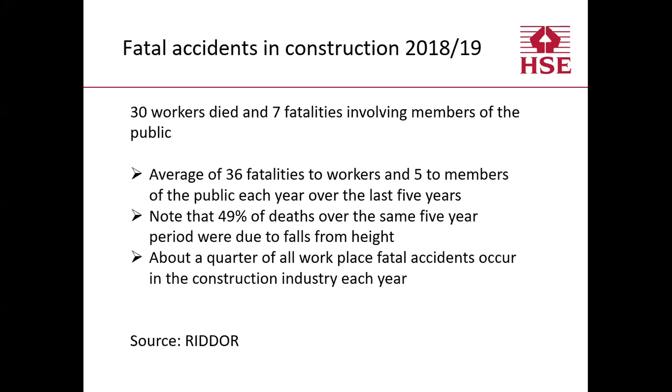But I think what's particularly of a concern is the fact that if you look at all workplace fatal accidents that occur across British industry, then about a quarter of those occur in the construction sector each year. Although the health and safety performance in the sector has improved significantly over the past decade, and we've seen a fairly general long-term downward trend in the number and rate of fatal injuries, the sector remains one of the most hazardous, accounting for, as I say, about a quarter of all fatal injuries to workers. It's truly shocking if you look into the detail.

For example, the 5-year period from April 2012 to March 2017, almost 200 construction workers were killed in workplace accidents. And looking at the average of the last 3 years, each year, about 64,000 workers in the industry receive an injury at work, and about 80,000 suffer from work-related ill health. The majority of fatal accidents, sadly, involve small businesses, SMEs, and nearly half of all reported injuries occur in refurbishment activities. Risks on larger projects can, of course, be substantial, but generally speaking, the larger projects are better at controlling risks than most small projects.

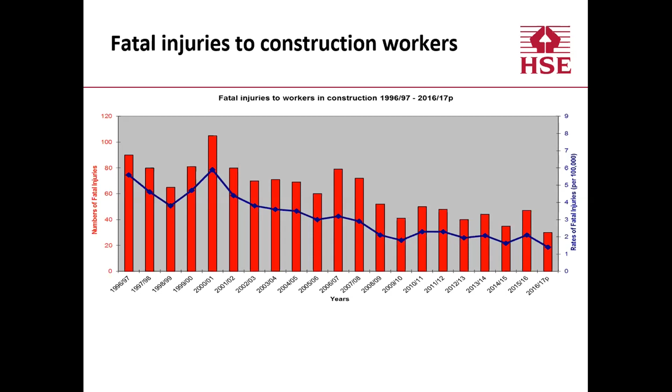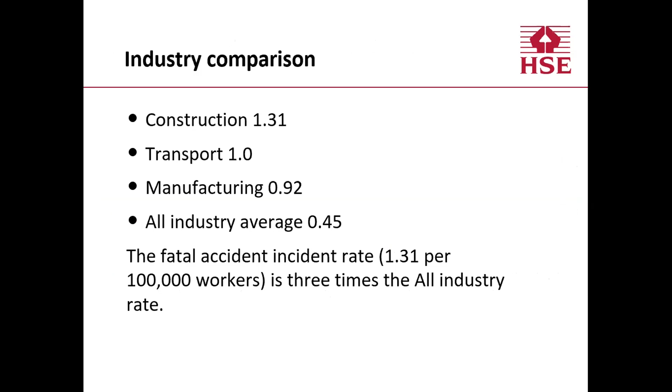So how does it compare with other sectors? Well, this slide just gives you an indication of health and safety performance by means of looking at the fatal accident incident rate. That's the number of fatalities per 100,000 workers in the industry. Probably no great surprise to you to see here that the fatal accident incident rate for construction is 3 times the all industry rate. And in fact, construction is second only to agriculture in terms of being the poorest performer.

So of course, we do want to see a continuation of the downward trend in fatal accidents, work-related ill health and injury. And so it goes without saying construction will continue to be a priority sector for HSE.

In terms of enforcement, then, I've put this slide in because I think it's important that we recognise that there's a lot of enforcement still being undertaken by our inspectors in our operational teams. And in fact, for 2018-2019, just under 3,000 enforcement notices were served by inspectors during the course of their interventions. Approximately 1,300 were improvement notices and 1,600 were prohibition notices.

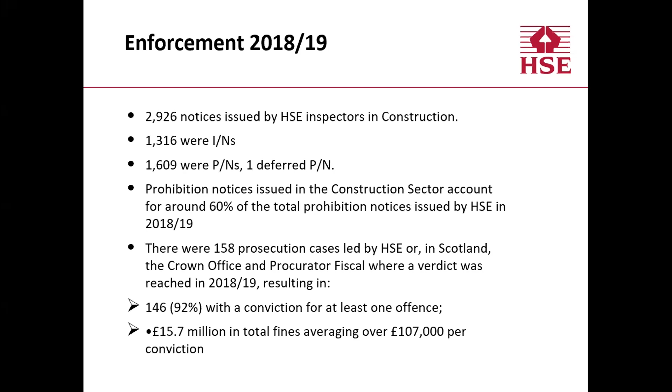And in fact, on the prohibition notice side, that actually accounts for around 60% of all prohibition notices issued by HSE. So it's certainly an enforcement-rich environment. During that particular year, there were 158 prosecution cases with a 92% successful conviction rate. And as you can see from that slide, the average fine was in fact in excess of 100,000 per conviction.

So where does that lead us to? What do we conclude from that? Well, clearly construction will continue to be a priority for HSE. And hopefully most of you will have seen the sector plan for health and safety in construction, which is published on the HSE website. I haven't got time today to go through everything that it covers, but I just wanted really to pick out 3 key areas.

As I said just a few minutes ago, we have a really big problem with the death and injuries on the smaller sites and the SMEs. So we want to continue supporting small businesses to achieve improved risk management and control. And also, the focus has to be on ill health. We can't just ignore health. We need to see a reduction in ill health, and particularly a focus on occupational lung disease and MSDs.

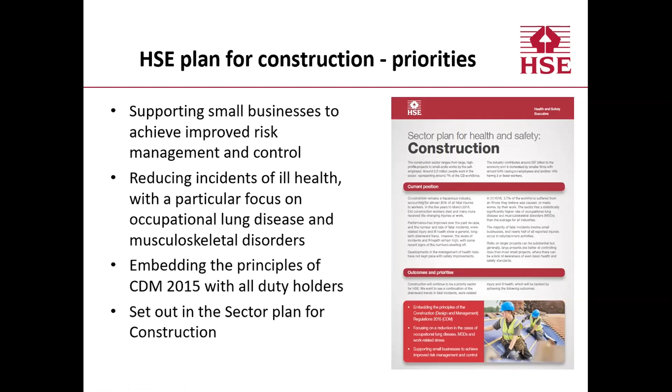And key to achieving the outcomes that we want at site level, we must ensure that we embed the principles of CDM 2015 with all duty holders. So it's not just the people at the sharp end, it's all the duty holders. We need to take a holistic view and make sure that all duty holders are fulfilling their roles adequately. And all of this, as I say, is set out in the sector plan for construction.

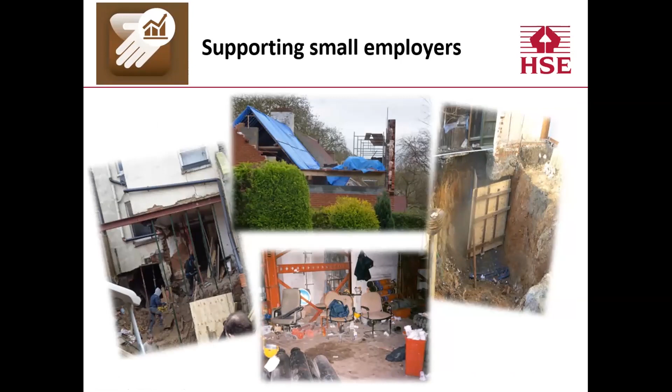By supporting small employers, yes, of course, we're going to continue to refine and update and improve our guidance. But small employers and small sites, they remain a challenge for us because we do find very poor standards very often when we visit them. And it comes as no surprise, I guess, that they're responsible for around 3/4 of all the fatalities that we have. And 1/3 of those are to self-employed individuals.

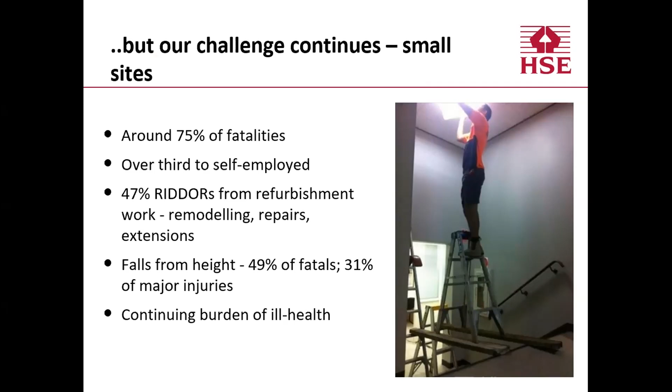Almost half of the RIDDORs we get are from refurbishment work, which is the kind of work that you typically find SMEs engaged in. And as I mentioned earlier, falls from height account for about half of all those fatalities and 1/3 of all major injuries. And sadly, there's also the continuing burden of ill health.

So the challenge that we face in the industry, I think, is this. We need to treat health like we treat safety. We need to ensure that we have in place adequate measures to manage health risks, because ultimately that should be no different to managing safety risks.

And it is possible and it is practical to carry out work without causing ill health. And crucially, everyone has a role to play. It's not just about the person at the sharp end on the tools. Everybody must take ownership of their part of the process.

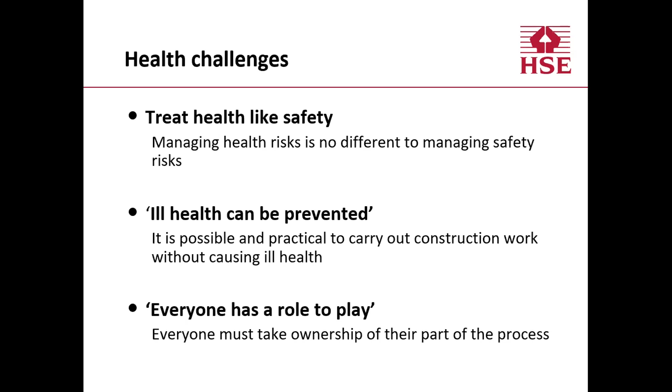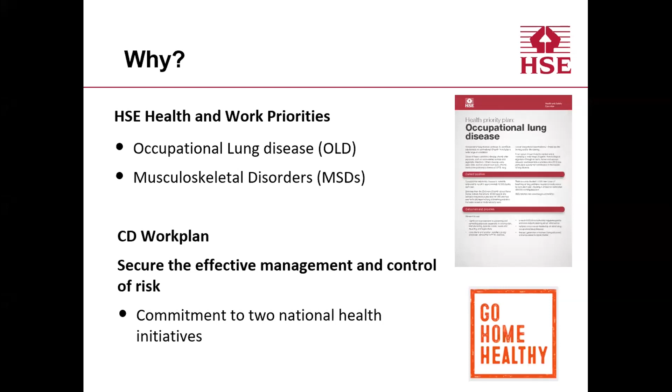So what can HSE do? Well, HSE decided last year that it would run a health inspection initiative. And this would be run in essentially 2 campaigns, which I'll come on to in a moment. The reasons for this, well, it's within the overall HSE priority plan, particularly in terms of tackling occupational lung disease and MSDs, and it was also within the construction sector work plan, as I mentioned a few moments ago, in terms of securing the effective management and control of risk. So on that basis, we committed to run 2 national initiatives.

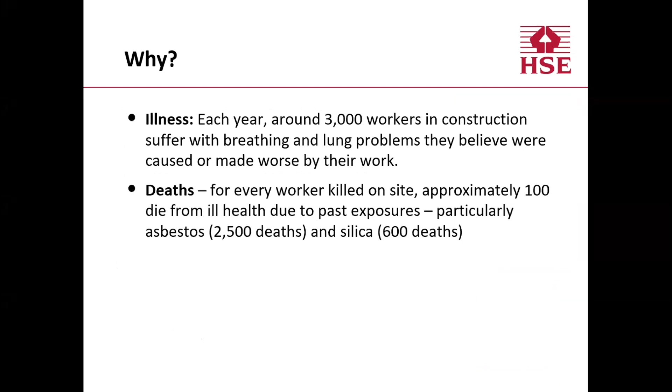We know each year around 3,000 workers in construction suffer with respiratory problems. And we also believe that for every worker killed on site, approximately 100 die from ill health due to past exposures, particularly in relation to asbestos and silica.

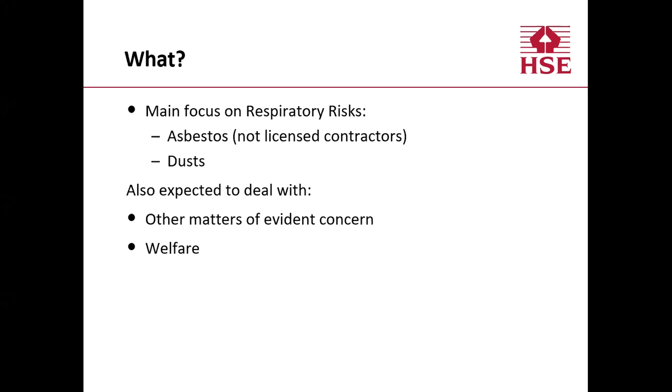So we decided in this campaign we'd focus very much on respiratory risks and their control. We'd be looking at asbestos, and we'd also be looking at a variety of dusts. Our inspectors in the field were also instructed that they were to deal with any other matters of evident concern, and also to focus on ensuring that welfare was adequate.

As I say, this was to be a national inspection campaign targeting a whole range of sites where at least one significant respiratory risk was anticipated. And crucially, we decided that we wanted to get a broad range of data from our visits. So no sites were to be excluded. We were not just focusing on small refurbishments or domestics.

We were looking at a cross-section of sites right across the board, using local knowledge, using our F10 notification database in order to maximize our operational efficiency and impact. The campaign was run in 2 phases, one in the summer, one in the autumn, and we gathered the data from that, which we then were able to analyze. We carried out almost 1,700 inspections in that time.

And looking at the data afterwards, we found that overall the material breach rate was 53%. An inspection was considered to have found a material breach if the visit resulted in the issue of a PN, an IN, or a notice of contravention. As you can see, the breach rate generally decreased as both duty holder and site size increased. And probably no surprises, domestic refurbishment had the highest material breach rate at 65%, and new build commercial the lowest, but still an interesting 46%.

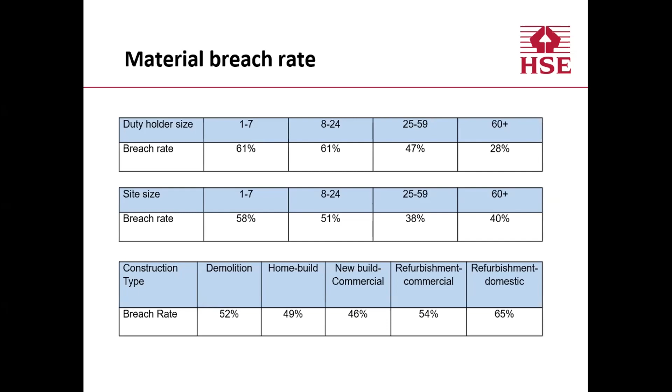In terms of compliance ratings, I've put this slide in because I think it's quite useful in terms of giving you a broad indication of the level of compliance on a whole range of topics. So if you look at the column with the number 1 at the top, a number 1 compliance rating is given for sustained compliance. So for example, with work at height, where that topic was encountered on site, 31% of the working at height received a 1 rating, indicating sustained compliance. Everything to the right of that, ratings 2, 3, and 4, are varying levels of non-compliance, with 4 being the worst rating.

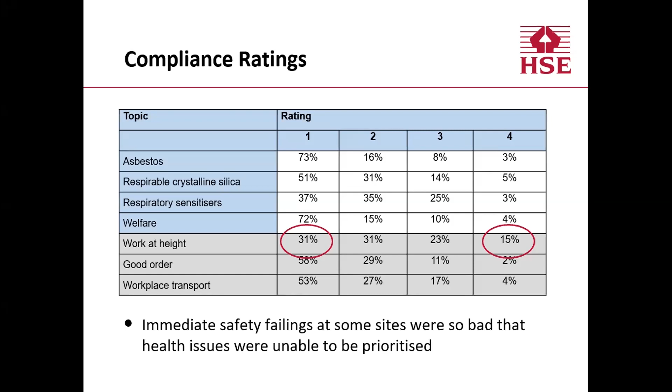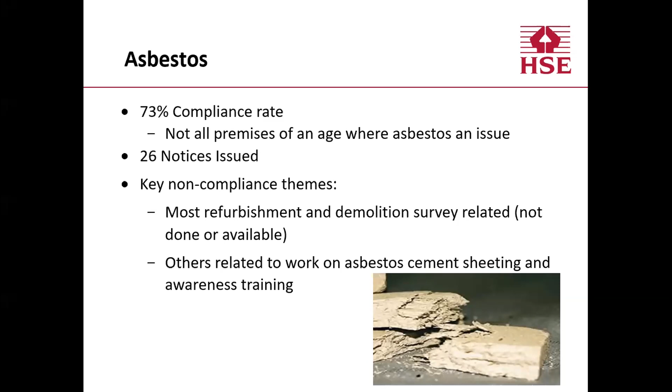Looking at some of the issues that inspectors found on site, with asbestos, we had a 73% compliance rate, but nevertheless, we still had 26 notices served. And as you can see on this slide, the key non-compliance is related to surveys, either missing or inadequate. Others were relating to work on asbestos cement sheeting and the lack of awareness training.

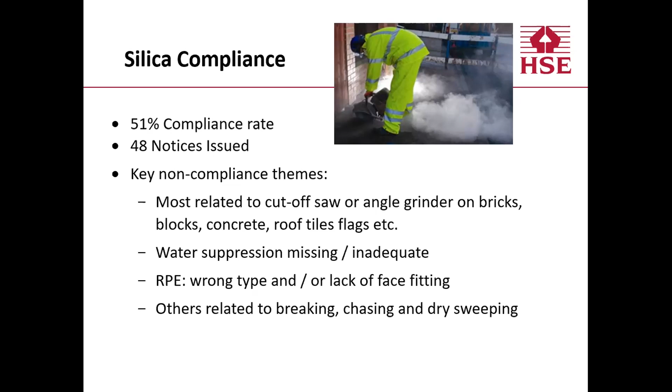Silica, only a 51% compliance rate, 48 notices, and key non-compliance themes. I guess no surprises. You can see in that photograph a fairly typical example of using an angle grinder or cut-off saw without any dust suppression, wrong RPE or lack of face fit testing, dry sweeping, a whole range of issues.

And similarly with respiratory sensitizers, where we only had a 37% compliance rate. This is mainly in relation to woodworking, carpentry, 17 notices and key non-compliances, again relating to cutting activities with power tools, lack of extraction, wrong type of RPE, or RPE missing altogether, lack of face fit testing, and dry brushing and sweeping. So I guess probably no surprises, but nonetheless, extremely disappointing to see the failure to provide so many basic precautionary measures.

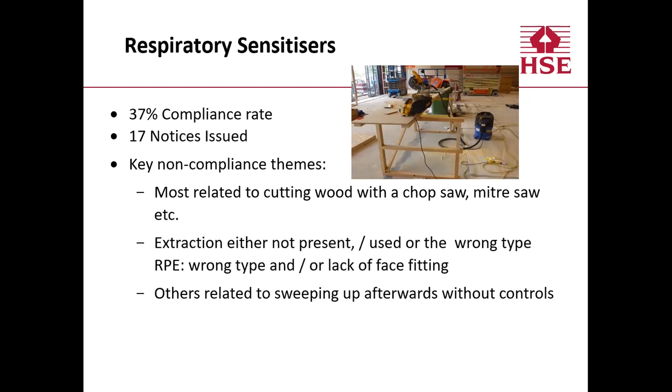Welfare, 72% compliance rate, but nevertheless 49 notices issued. I just cannot believe that we can't get adequate toilet and washing facilities in this day and age. Unbelievable, some sites still without any facilities at all, or some sites where the facilities that were provided were wholly inadequate or inadequately maintained, sometimes no flushing toilet, lack of running water, all sorts of potentially straightforward issues that hadn't been resolved, resulting in enforcement action.

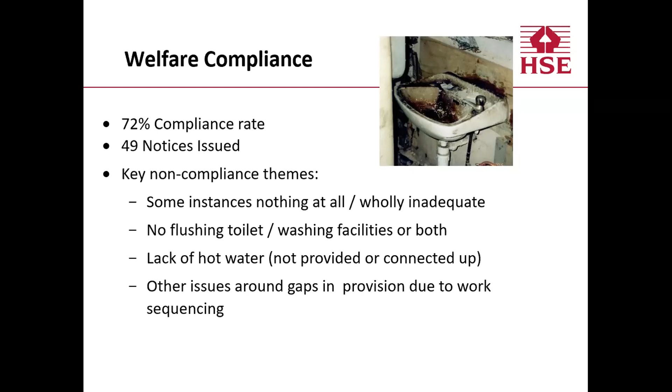So then, just to kind of summarize, what does this tell us? Well, it's given us a snapshot of the industry, and the chances are that if we went out and carried out the same intervention again, we'd get the same results or very similar results. The risk profile of the industry hasn't really changed that much. I was inspecting construction 20 years ago, same problems 20 years ago, same problems today.

Work at height, in particular in the small refurbishment jobs, it's a classic enforcement scenario. Lots of enforcement action required to address fairly basic failures to manage work at height correctly. The frustration is that the industry knows what's wrong and has known what's wrong for a long time now, but it needs to take more fundamental action, do something positive about it.

And we do believe that improving things goes beyond simply regulation and guidance on what to do. HSE has produced tons of guidance over the years, and other duty holders have done the same. But we need to go beyond that. We need to take the next step, because it's really about changing hearts and minds, behaviours and relationships, if we really want to make a difference to those awful statistics that we saw near the beginning.

So again, turning to our priorities, yes, we're going to continue supporting small businesses so they know how to achieve improved risk management and control at site level. And we must work harder to reduce incidents of ill health, with a particular focus on those occupational lung diseases and MSDs. And it's important that we do continue to embed the principles of CDM 2015 with all of the duty holders.

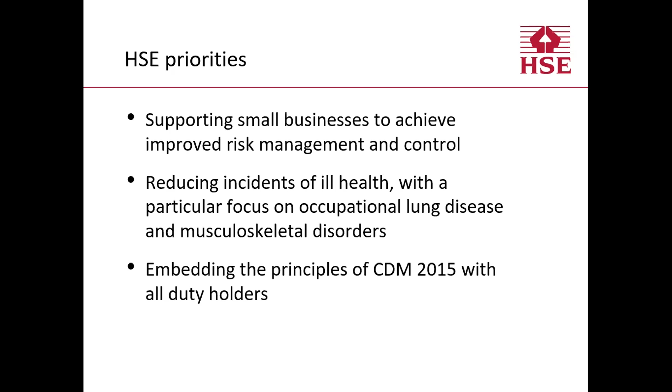When I talk about embedding CDM, I think it's important that we look beyond simply the contractors working on site. We have three key priorities within CDM. This is really adding clarity to our priorities. The inclusion of the client, of course, is vital, but we need to find new ways of persuading and engaging with disengaged clients. We need to persuade clients and their advisors that investment in planning the pre-construction phase will pay off.

And in design and planning, we need to share our learning through our own experience of engaging with duty holders and what we believe is emerging as best practice in complying with CDM. And as digital technology moves forward, we're beginning to find that these could potentially be a huge benefit for designers and principal designers in carrying out their planning, management, and coordination roles. And we hope that as we go forward, we'll be able to share with the industry how these can contribute and inspire designers and principal designers to use and develop these tools.

So how are we going to do that? Some of these objectives are things that HSE can try and do alone, but most of them are going to involve some engagement with the industry. How will we achieve what we want to achieve? Well, HSE has a long and well-established history of working with the construction sector stakeholders, and one of the best ways that we do that is working through our industry advisory committee, CONIAC.

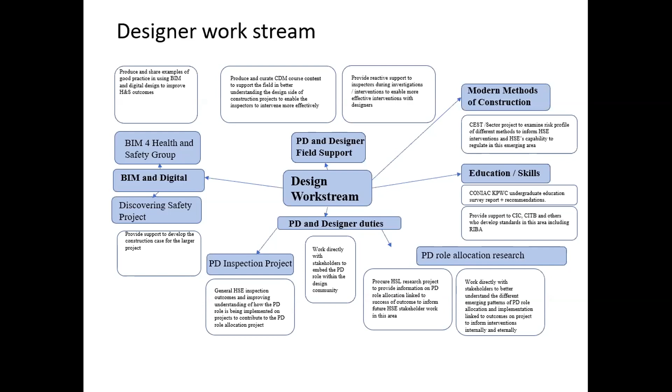This next slide really just is there to indicate that we have a number of work streams that these working groups are tasked with undertaking. And this particular slide shows a whole range of projects that are being carried out in the designer work stream. Unfortunately, we don't have time to go through all of them today, but if I could draw your attention to the left-hand side of the slide, you'll see we've got a reference there to BIM for Health and Safety Group and BIM and Digital. And that's something that I want to share with you a little bit more this afternoon. But clearly, as you can see from this slide, there's a whole range of projects and work that's going on involving collaboration with the industry.

Before we talk about BIM, I just want to remind ourselves about the key functions of the principal designer within CDM 2015, and particularly about risk: identifying and tracking risk, scrutinizing how risk is being treated. Is it being eliminated, reduced and controlled, and what information is being provided, particularly about residual risk. The importance of coordinating with other designers and their risk mitigation measures, and then crucially, handing over designs at the end of the day which can be constructed safely. So if we can try and keep those in mind when we're considering the application of BIM.

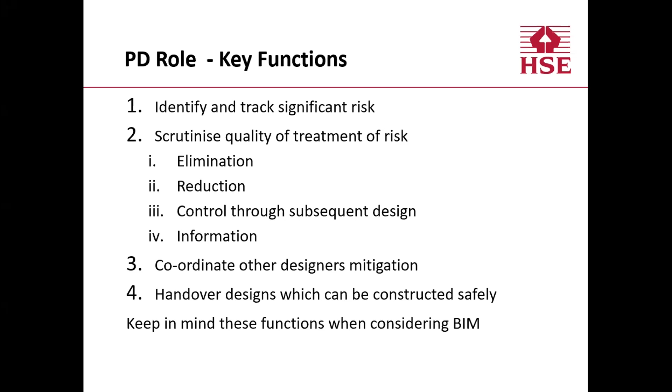It turned out that the wall that collapsed, and in fact the building, had been surveyed and information recorded about the risks of working near this wall. The information was in a report, but that information never reached the people who needed it, who were planning to carry out the work in detail on the site. Crucially, the right information never reached the right people at the right time, and 2 people died.

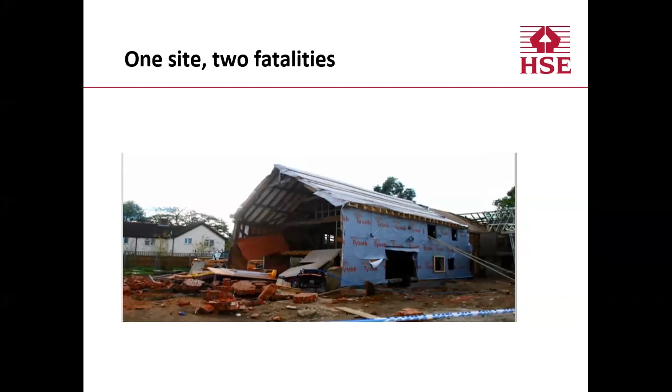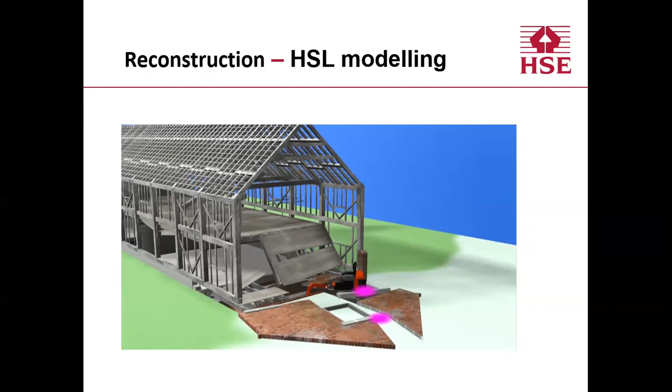So with this in mind, a question for clients, for principal designers and contractors: do you have confidence in your critical health and safety data, not just in terms of the content, but how it's delivered, how it's presented, and is it understood? Is there potential for confusion? And most importantly, how will we prevent harm?

Well, one of the areas that we've been paying a lot of attention to in the last 12 months or more is in the area of building information modeling, or BIM, for health and safety. It's not a new tool, it's been around for a while. And of course, with that example of the small barn that collapsed, we had a model there looking at things with the benefit of hindsight. But essentially, BIM is a tool that enhances foresight. It provides a line of sight from the earliest opportunity in the design process to identify a risk through the construction phase and then into future maintenance and use.

A number of real positive advantages of using BIM: the power of visualization, the fact that it facilitates collaboration, improves learning and understanding. I guess at the end of the day, the big argument is that by doing more planning and design in the pre-construction phase, then the construction will be made safer. So the overall message to designers and principal designers, I guess, is that BIM tools can prevent harm and help you do your job in fulfilling the aims of CDM 2015.

The benefits are not just for the larger projects. Projects of quite modest size can benefit from the improved precision of design and the ability to enhance collaboration within project teams that information modeling provides.

We are learning all the time with this, and we're learning particularly from the experience of others who've applied this in practice, but there is evidence that on those projects with forward-thinking clients and those that adopt BIM and digital design technologies, these tools are making a difference to the quality of risk management, and in particular, coordination of risk information in design. Of course, where issues are not addressed early on, projects can be delayed, and it can become significantly harder for contractors then to have to devise safe ways of working once they're on site.

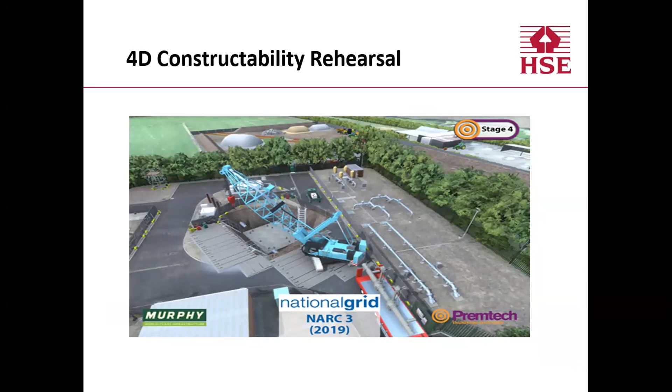Also, what proved particularly invaluable was the fact that they were able to produce these very, very detailed images of what the site would look like at various stages of the project.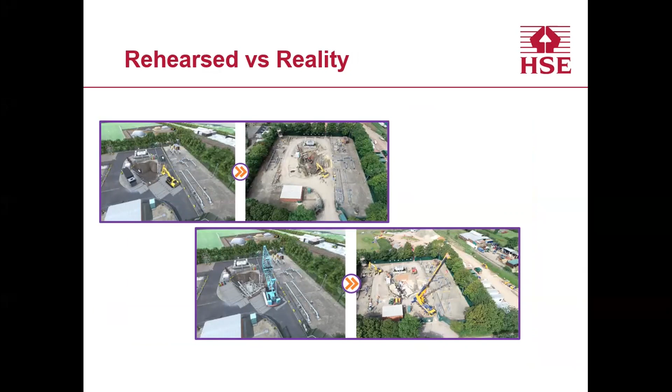And not only did they use the drones to create images of the site at various stages, but they were also able to produce very detailed models featuring rules-based clash detection, which is essentially a piece of software which enables you to calculate accurately and locate separation distances, hazard zones, exclusion zones, and so on. And this is one of the key benefits of digital rehearsal.

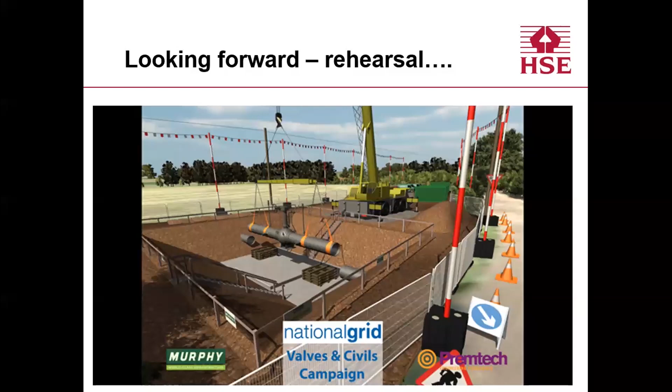As part of the work that they were doing and to provide the construction teams on site with useful detail, a key aspect of this particular project was to create photorealistic posters and boards well in advance of work being undertaken. This included temporary works and was able to be used to form part of site inductions and toolbox talks for workers on site.

So a very valuable means of communicating information and illustrating to workers what the site would look like at various stages of the build.

Taking things forward one step further, National Grid realized that these technologies could potentially have a benefit for a whole lot of routine tasks that they were required to undertake. This particular slide shows a task to replace a joint between pipes where the pipe sits on a plinth. They'd previously had an accident when they'd attempted to remove the plinth in order to do the job.

So what they instructed Premtech to do was to use digital technology to rehearse a whole series of alternative options in order to devise a safe system of work. In the end, they came up with a solution involving a diamond cutting tool to remove the plinth.

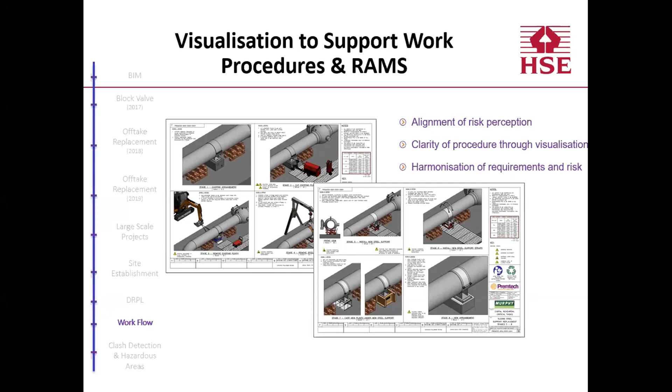But essentially, I put this slide on to show how it was used to develop RAMs and safe work procedures, which could then be shared with the contractor, so the contractor could see quite clearly what the risks were and how the job could be carried out safely.

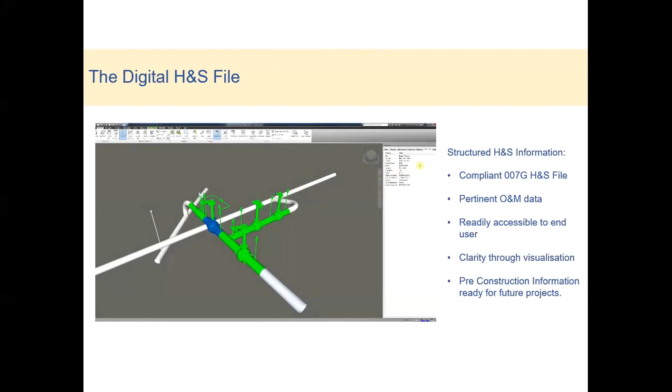Finally, just to mention the digital health and safety file. This was another benefit that this technology brought to the project, in that National Grid were able to collate information about the project. Documentation was scanned and uploaded, and then using this very sophisticated software, they were able to create a digital model of the plant.

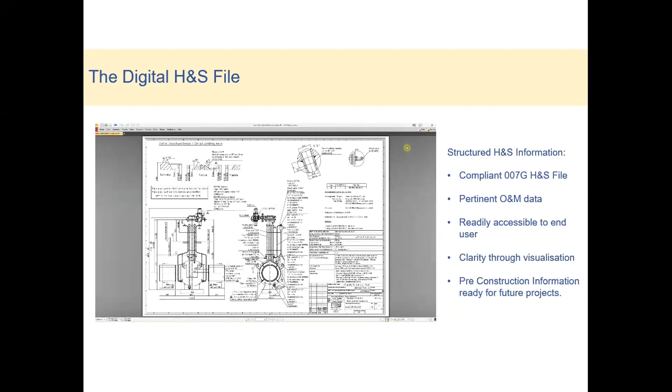And within the model, they were able to embed all the relevant health and safety documents that were needed to form part of the health and safety file. This was fully compliant with National Grid's own internal systems and procedures, but made the information readily accessible to the end user. And using the digital technologies like this also enabled the work to be done safely and quickly.

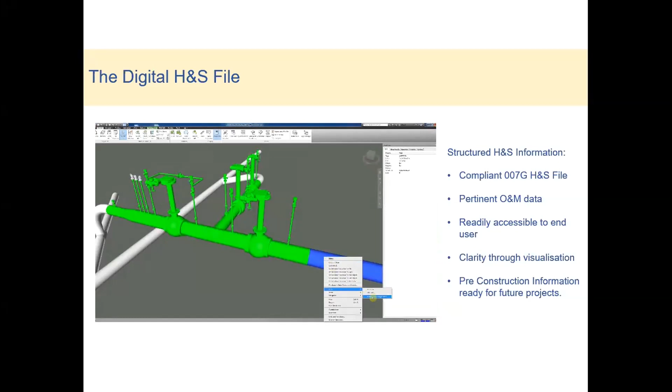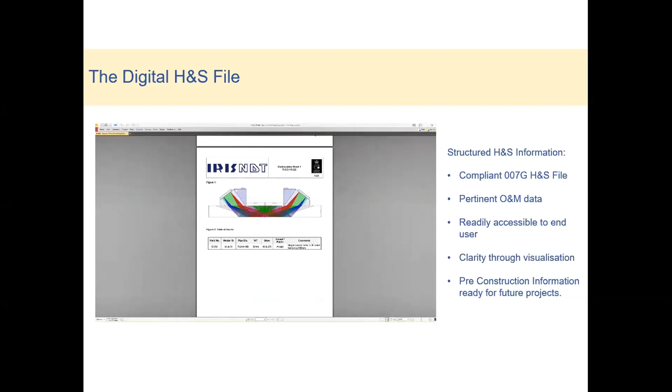So to sum up then, from this Premtech case study, the key benefits that were reported by all the duty holders participating in the project. Firstly, the reduction of accidents. As I said earlier, a 3-year project without a single RIDDOR reportable incident. And all parties reported improved collaboration.

There was much better alignment of risk perception by all the parties who were working on the project, improved process safety, communications, and worker engagement. There was much better coordination of temporary and permanent works, and as a result, improved cost and program certainty.

Okay, that's been a very rapid fire run through BIM and the use of digital technologies. I'd now like to just talk very quickly about some other initiatives where HSE and industry have been working together through CONIAC. And if you remember, one of the key objectives was about supporting SMEs in terms of giving them the tools they need to manage health and safety risks more effectively, and also to provide further assistance for clients so that clients are aware of the duties. So I'll now very briefly take you through 3 other pieces of collaborative work.

The first of these is the Client Buddy Scheme. And this was a project that's been running under the guidance of the Construction Clients Leadership Group, the CCLG. And essentially, the CCLG have established a website with information which is specifically for business owners who may be embarking on a construction project for the first time, taking on the role and the duties of a construction client under CDM 2015. The purpose of the scheme is to equip clients with the knowledge they need to engage successfully with the construction industry, to help them understand their responsibilities and to provide them with advice and guidance.

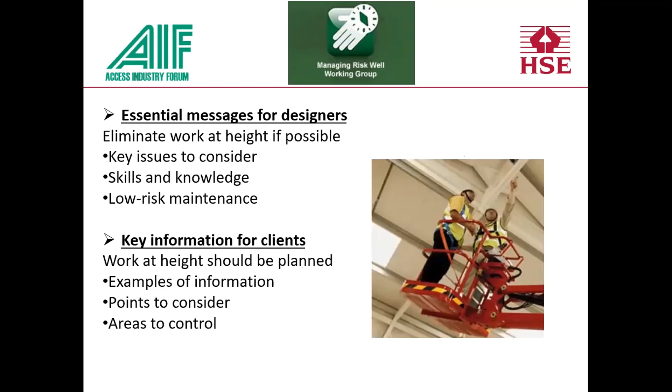And although Safety Steps contains fairly general rather than task-specific messages, so for example, they don't provide information about specific situations where you use scaffolding or MEWPs or working on roofs, they give you essential messages that can underpin any type of work at height activity, and these can then be used for toolbox talks, training materials, and so forth. So they have a whole series of information sheets that you can download free of charge, one for designers, one for clients, one for managers, one for supervisors, and of course, crucially, one for those who are actually carrying out the work at height.